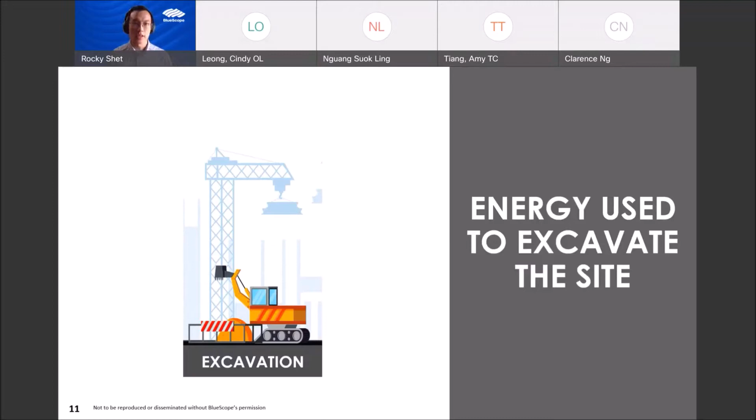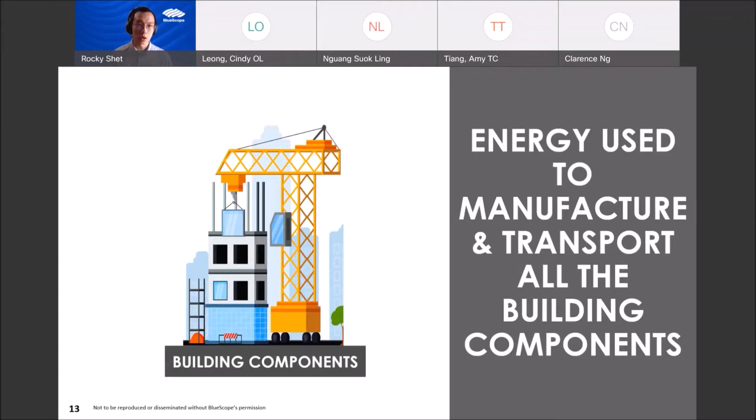So the energy used to excavate, for example, a site, and the energy used to build the structures, and also the energy used for all the building materials to be manufactured, transported, and installed onto the building site - all this energy will be calculated together, and we draw a line when the construction is completed.

Of course, throughout the building lifespan, if there is any retrofitting, those will also be counted into this embodied energy. Then when the building is in use, during the usage time, there'll be energy - like electricity, water heater, cooling systems, and whatnot - that is used to operate this specific building.

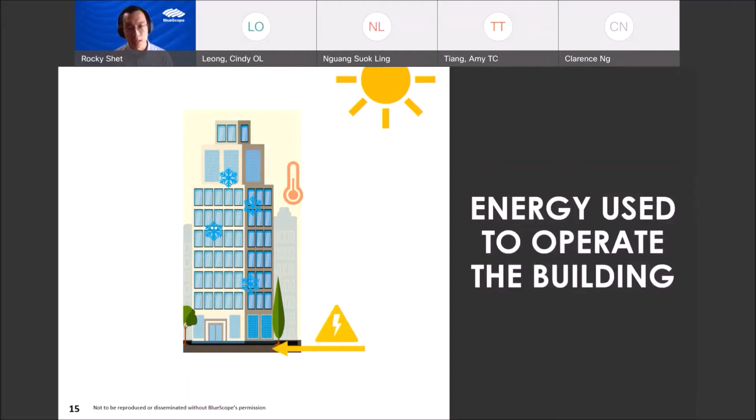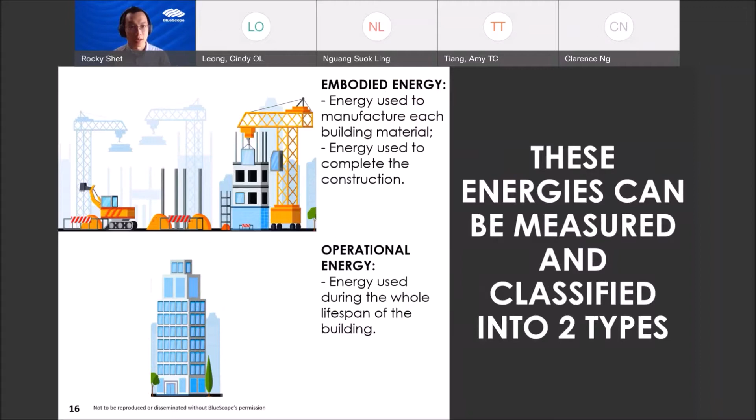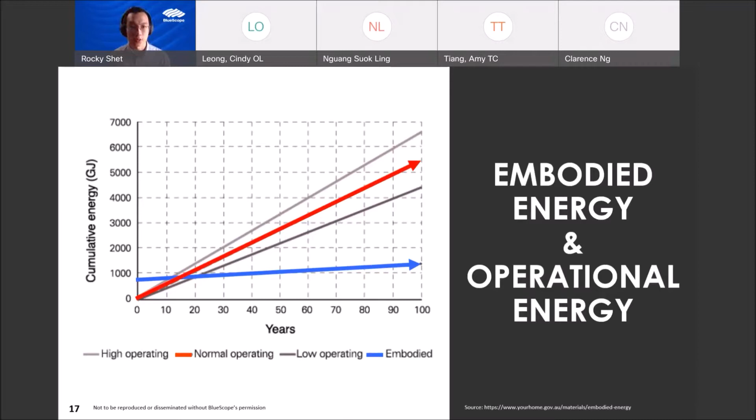So these two are very important concepts for us to use during my presentation later on. I'll link some of the aspects for metal cladding to these two specific types of energy use and how it contributes to different energy. So the first one is what we call recycled content.

So for metal cladding, of course, we use different types of metal, but prominently we use steel, right? Steel is recyclable. Let me just show you upfront. In different rating tools, you can actually score different possible ranges of scores for recycled content of the metal cladding.

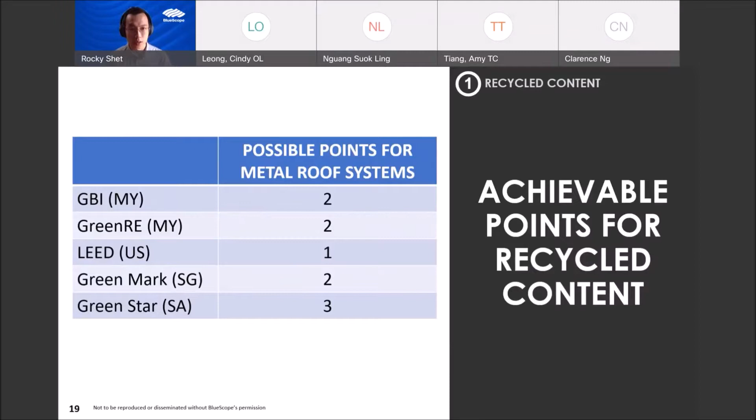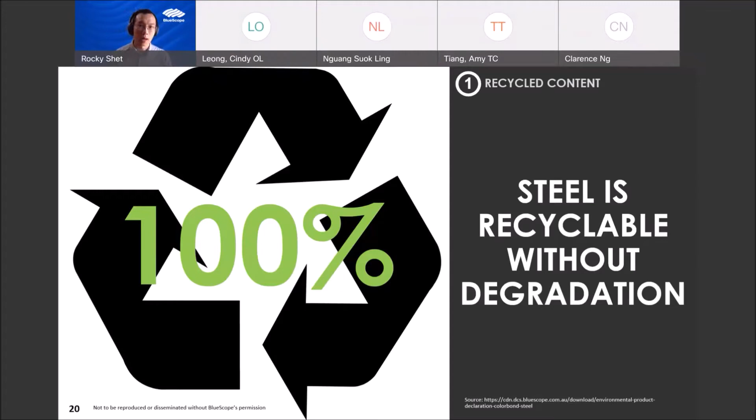Of course you can search online for all these rating tools for different types of building. But the idea is that steel itself is virtually 100% recyclable without any degradation, right? So you can recycle it without worrying that the quality will degrade in the long term. But of course, doing so we have to consider the life cycle of steel, from raw material extraction all the way to usage, installation, and of course recycling.

So the emphasis here for recycled content is the last part, where we get the offcuts or even the waste or scraps from the construction sites to the recycling or upstream process of making steel. Here I would like to highlight two terms. One is called pre-consumer recycled content, and another one is called post-consumer recycled content. These two factors will be used to calculate the overall recycled content.

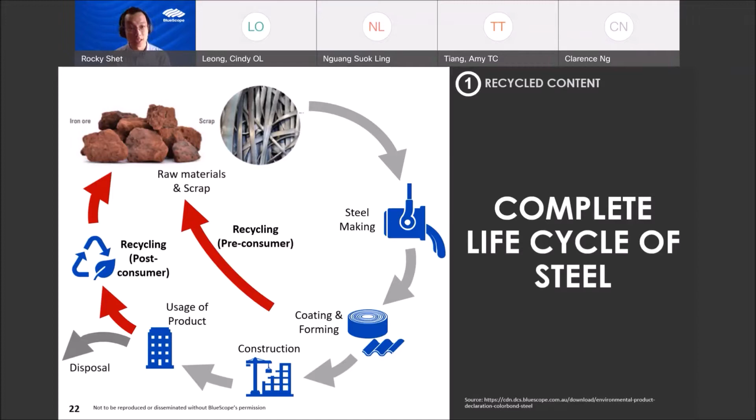For your simple understanding, pre-consumer recycled content means the scraps that are generated when the product is still in the production stage, right? Those offcuts from the production stage will be sent to recycling. The second one, post-consumer recycled content, is sourced from, say, construction sites when the building has reached its end of life.

The recycled content calculation is not as simple as adding post-consumer plus pre-consumer, but it works this way: 100% of the post-consumer recycled content, plus half of the percentage of pre-consumer recycled content. That gives you the overall steel recycled content.

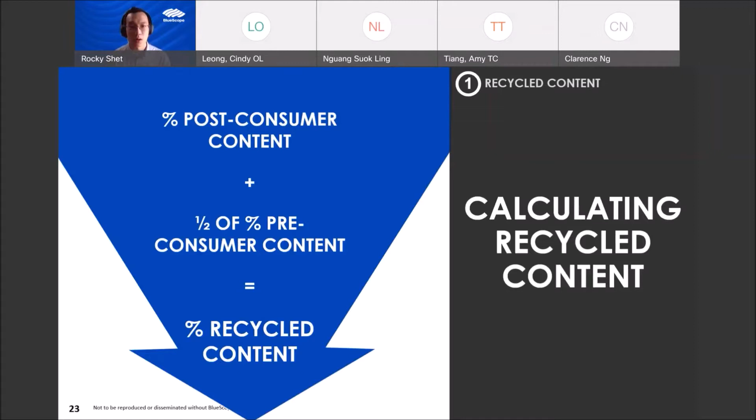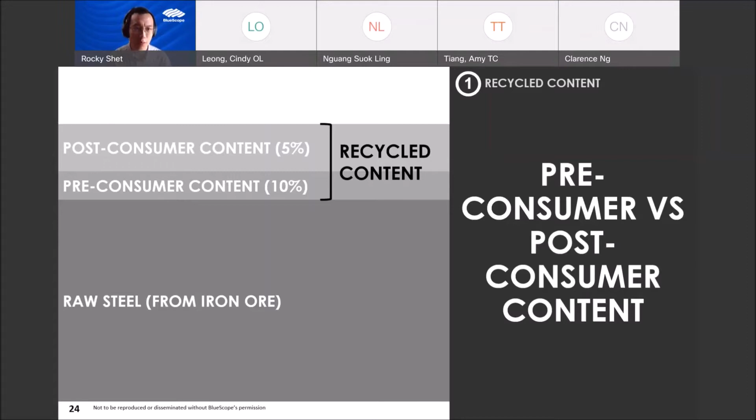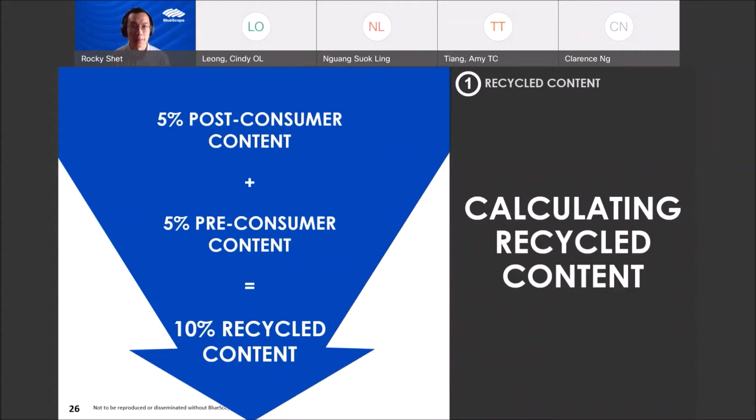For example, let's say in my steel I throw in 5% of post-consumer recycled content and 10% of pre-consumer recycled content. What does it give me? Here you can see the calculation is very simple. It's 5% plus half of the 10% pre-consumer, which gives you 10% overall recycled content. Based on different rating tools, the minimum requirements to score a certain level of points are as you can see here.

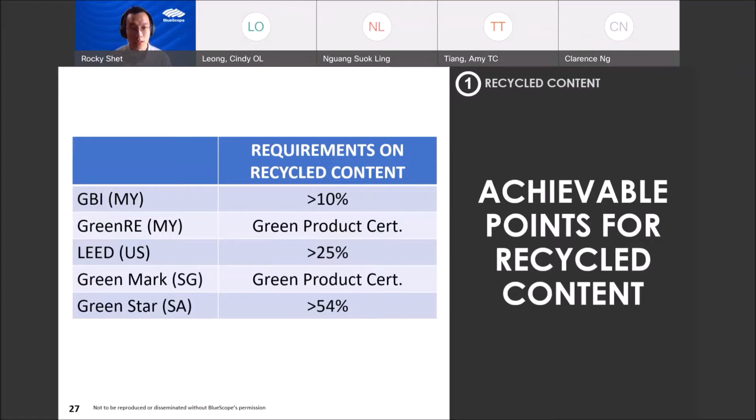Certain rating tools like GreenRE or Green Mark do not specify the percentage of recycled content. Rather, they emphasize green product certifications. The reason for this reference to product certification is that certain product certifications have already put in a minimum recycled content requirement for certain products. That's why it is more consistent for them to refer to the green product certs. But for others, it's much more specific, right?

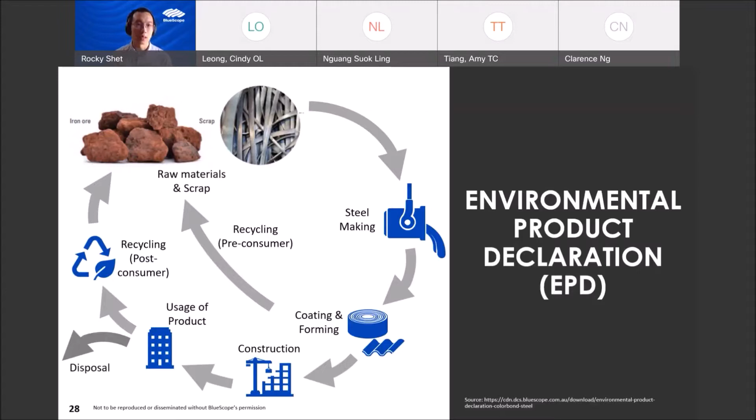So, coming back to this life cycle. What I would like to emphasize today is the next trend. Counting recycled content is not going to be the stop to make sure that there is a circular flow of material. The next step here is environmental product declaration, or in short, EPD.

What environmental product declaration means is that we will actually classify the product life cycle into different stages. As you can see here, there will be 5 stages: production stage, construction stage, use stage, end of life, and lastly the resource recovery stage.

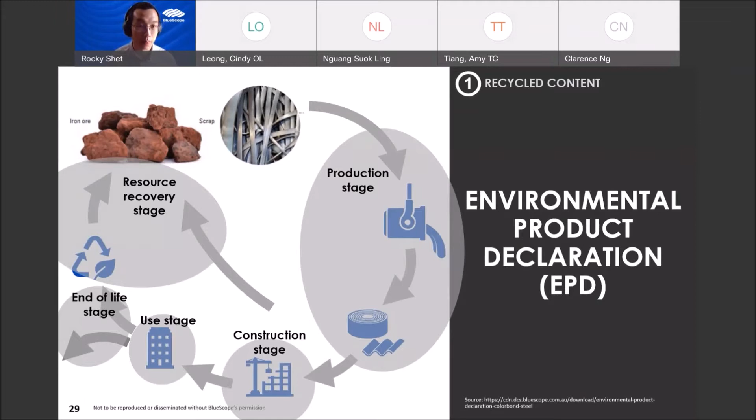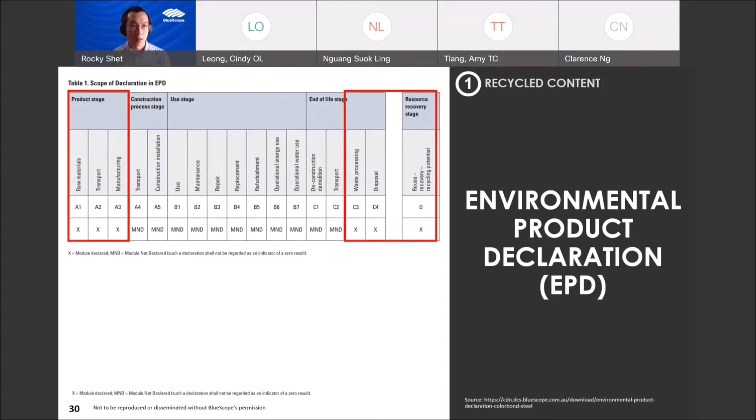Our counterpart in Australia has actually done such a study, and this study cannot be generalized for one product or one company. It has to be applied for that specific location, that specific production site. So this is done in Australia, and I'm just sharing with you what is possible, right?

For steel production upstream, we are involved in the production stage, part of the end of life stage, as well as the resource recovery stage, meaning recycling. Here you can see, based on certain standards, you can classify different stages with different letters: A for production stage, C for end of life, and D for resource recovery. B is for usage duration. The X means where we declared the energy use.

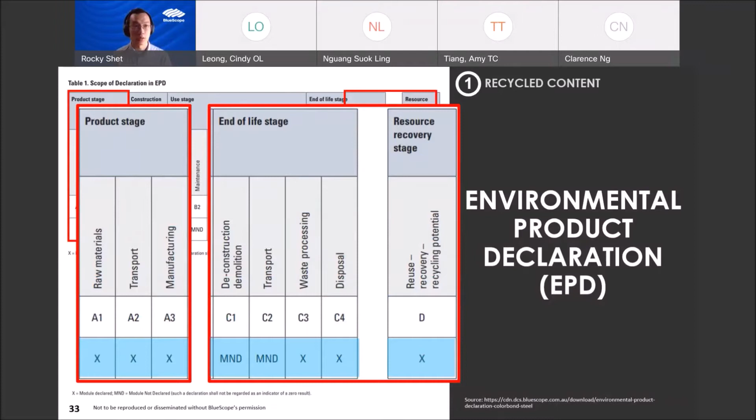Of course it looks something like this on a more detailed level. You can see it's very specific to a certain location, because aside from all these stages, transportation also counts as part of this EPD assessment.

So I extracted out the gist of what I'm going to show you today. Of course, part of this EPD declaration is that you need to calculate at different stages of the life cycle how much impact it causes to the environment. These are CO2 emissions in this specific process, the sulfur dioxide emissions, which contribute to acidification, also called acid rain in layperson's terms, and the energy depletion for natural non-renewable sources like fossil fuel.

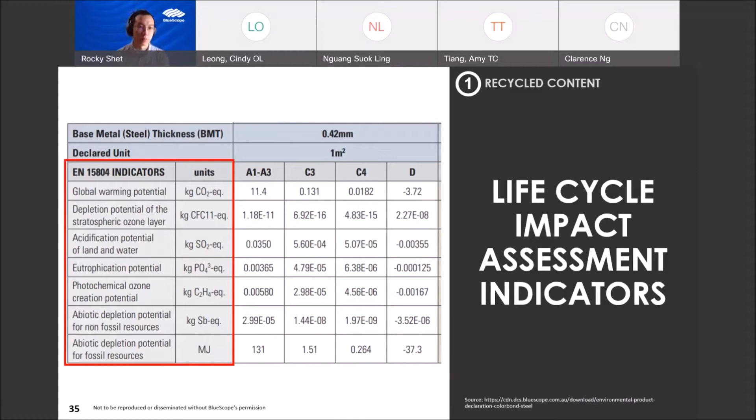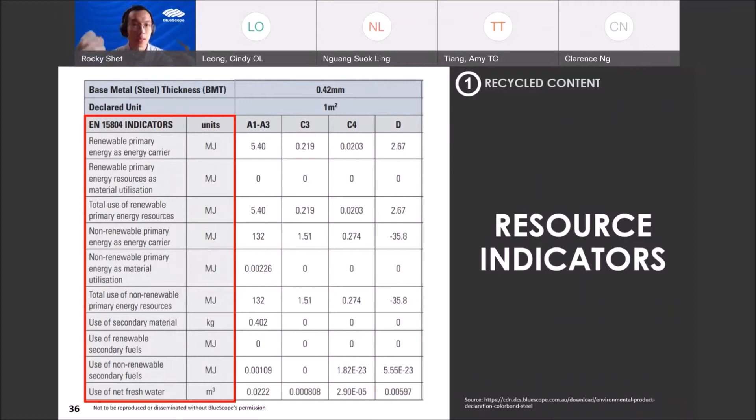Then there are also aspects of calculating the total energy use for different processes. So if you count the keyword energy, you're right, because again, we are linking back to the embodied energy here. Recycled content means the energy spent to produce this amount of steel, and that energy will be calculated into the material itself, and when it's used on your site, it is considered part of the energy used to build that building.

Then last but not least, some other potential hazards from these different processes. So if you look at certain figures like what you can see here, E negative 4 actually means 10 to the power of negative 4. It means it's very, very negligible. So there are certain numbers that you should be aware of.

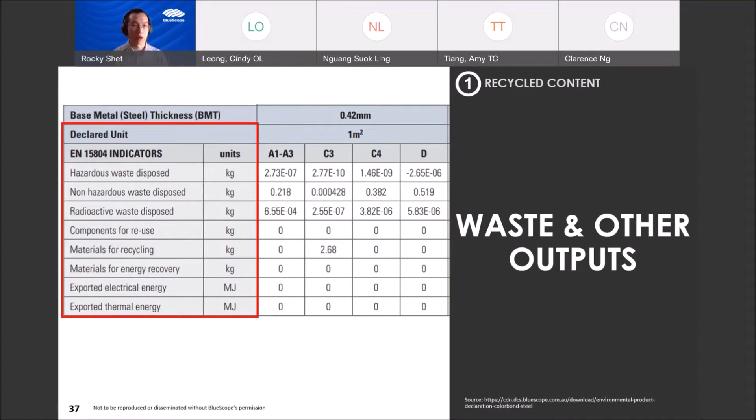But anyway, you can actually download this. It's a public document you can download as your reference. But again, it's not generalized, so you cannot use it for other countries or other production lines, especially in Malaysia.

So there are also green points applicable for the solar reflectance index. The recycled content I mentioned is for embodied energy. The solar reflectance index is to measure the performance of the building during its operational life, so it contributes to the operational energy side. So what is solar reflectance index? I'll get into it later on. But first, let me share with you the scoreable points for different rating tools. On average, 2-3 points are scoreable.

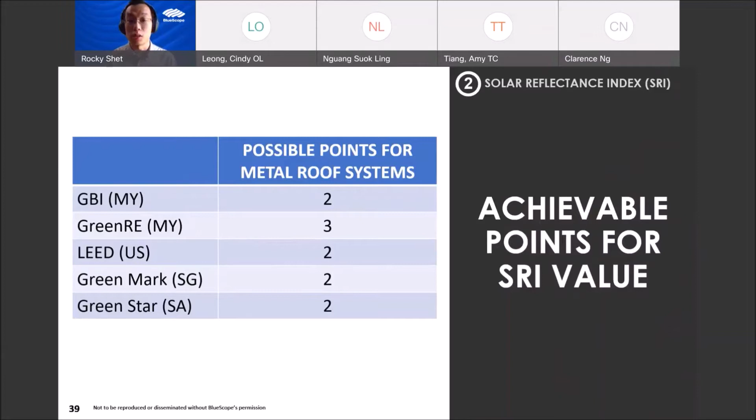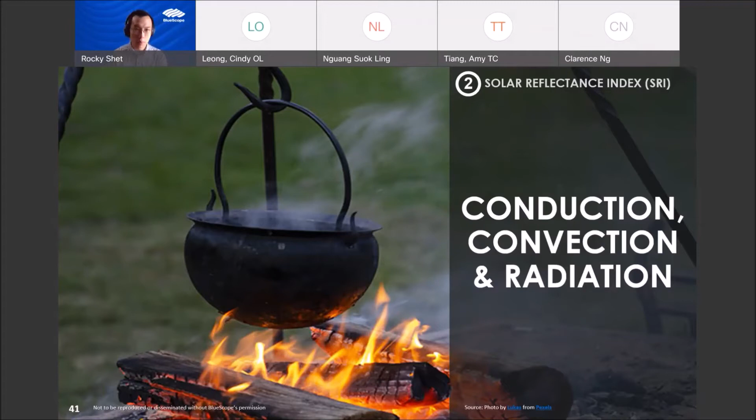Heat transfer basically means heat passing from one source to another. There are 3 mechanisms where heat passes from one body to another, or one medium to another medium: conduction, convection, and radiation. So how do these 3 work? Let me go in this order. I use this example of a campfire heating up a pot of hot water. The first is radiation, where when you have fire or any heat source, that heat source itself will emit radiation.

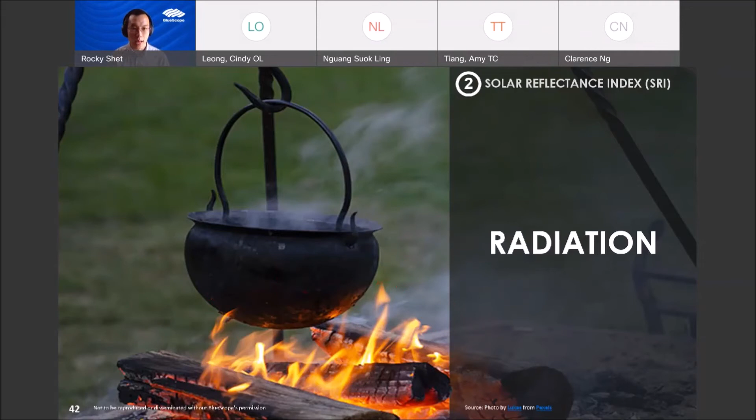The most common radiation that we expose ourselves to is sunlight, like vitamin D, when you stand under the sun. There are very harmful radiations and also not so harmful ones. Sunlight radiation is not so harmful to a certain extent. Radiation does not require a medium to transfer, so it can be transferred through air, through vacuum. So this is the first one.

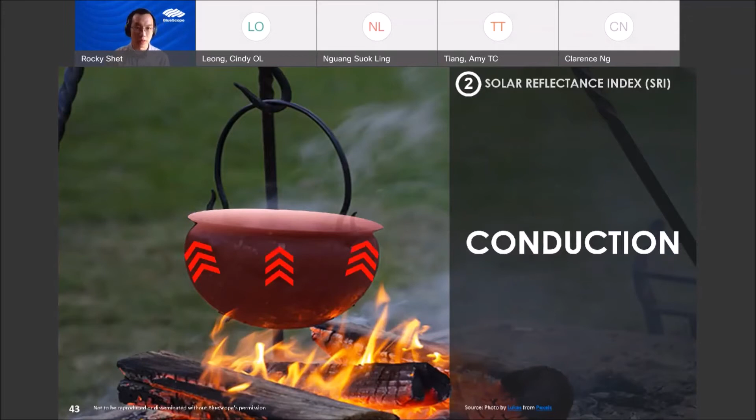The second one is what we call conduction. In this example, the metal itself gets heated up due to the radiation, and from there it transfers the heat from the closest part to the radiation to the furthest part. So it will heat up the whole homogeneous metal itself.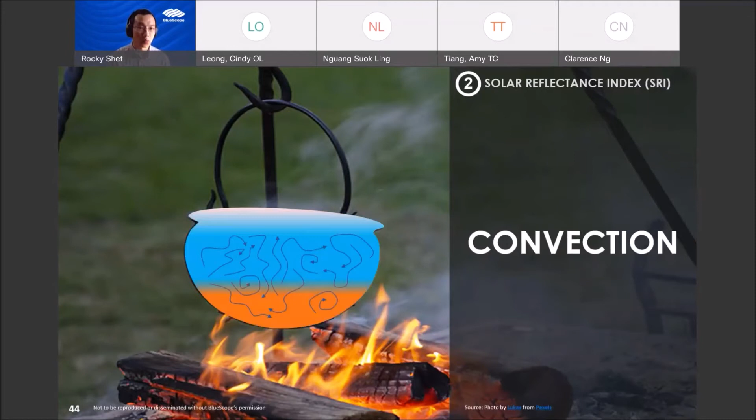The third mechanism is where it heats up the water inside. Water is considered a liquid, meaning it can flow, so the water will start moving around. That creates what we call convection. Heat transfers as the water goes around. And of course, when it evaporates, this is another form of convection, where it gets blown away by air.

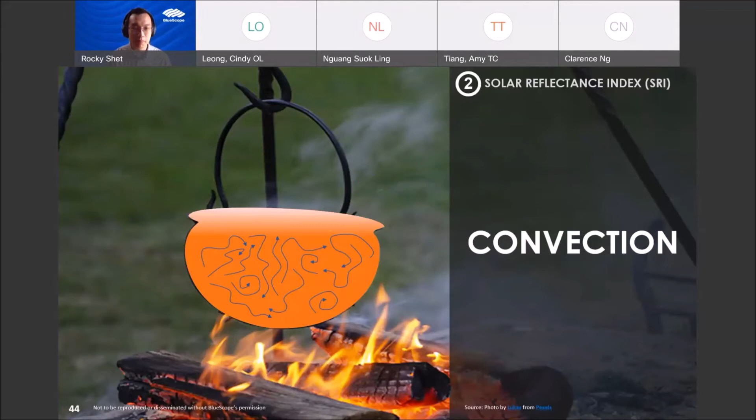And the air itself will actually act as a mechanism for convection, to cool down the surface, or even the metal itself. So these 3 principles are very important for this topic of solar reflectance index, because as I mentioned earlier, if we stand under the sun, the most common exposure of this type of heat transfer is sun. And for sun, the most common exposure of heat transfer is radiation.

So it's not very harmful, and the part where it will actually cause your building to heat up is the near infrared side. There are actually different spectrums of so-called sunlight, which we have covered previously on a certain occasion. But today I would like to focus on the near infrared spectrum of the sunlight. The near infrared spectrum of the sunlight is not visible. That means you cannot see it with your naked eye.

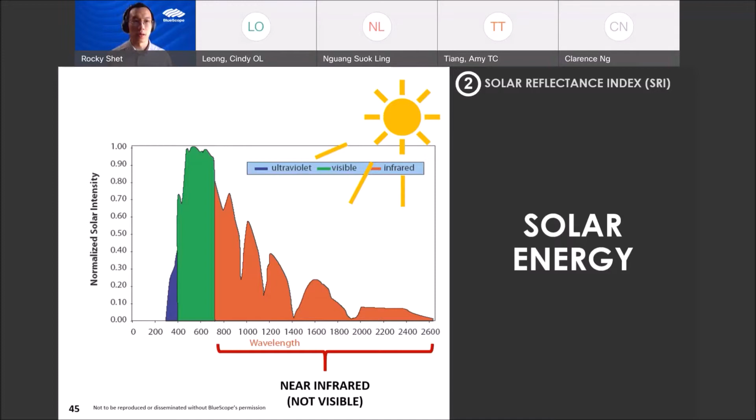But it will actually be felt through a different medium, which is heat. You can feel the heat if you stand under the sun, but you cannot see how it transfers to you. How it transfers to you is through radiation. So let me share with you how it heats up the building. When you have the sun and your building, if let's say your building is, for example, a black color. Today I'm using black color roofing sheets as an example, but it can be any other material, like tiles, asphalt, bricks, and so on.

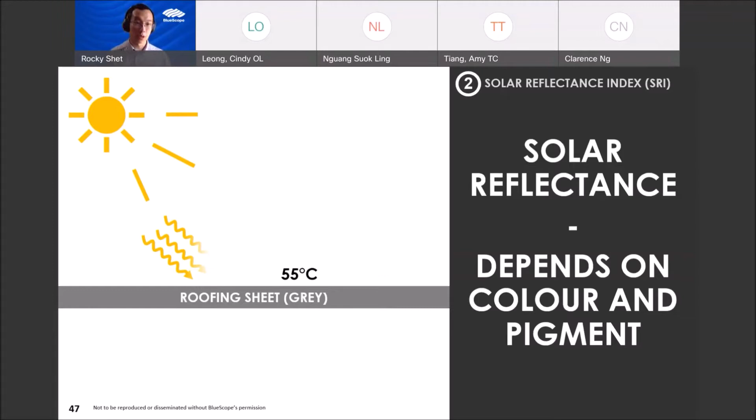But if let's say you change the color of the roofing sheet to gray, then more of the radiation is not absorbed, but is reflected, and the surface temperature will be reduced. And of course, if you have a lighter color like white, then most of the so-called radiation can be reflected. That means you will not heat up the roofing sheets so much. The example shown here is that the roofing sheets for this white color will be 40 degrees Celsius.

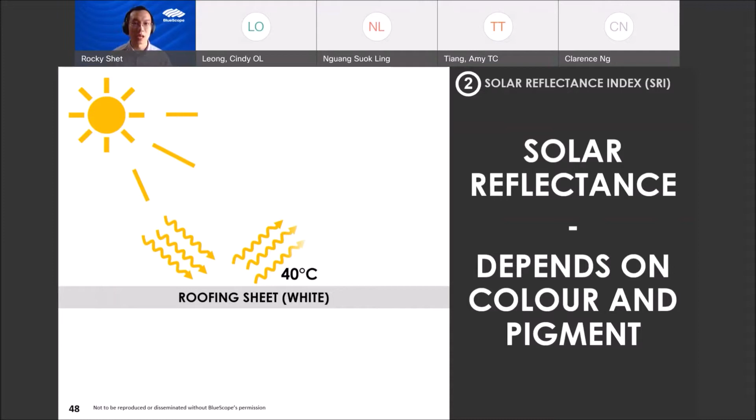So that aspect of the material is what we call solar reflectance. Solar reflectance. So we are getting closer to understanding what is solar reflectance index. This is the first aspect for you to understand solar reflectance index, or SRI. Of course, the second one is much more tricky, and is sometimes misunderstood. Even for me, initially when I did the study of this topic, I was also misunderstanding what is thermal emittance. So let me share with you the understanding of this.

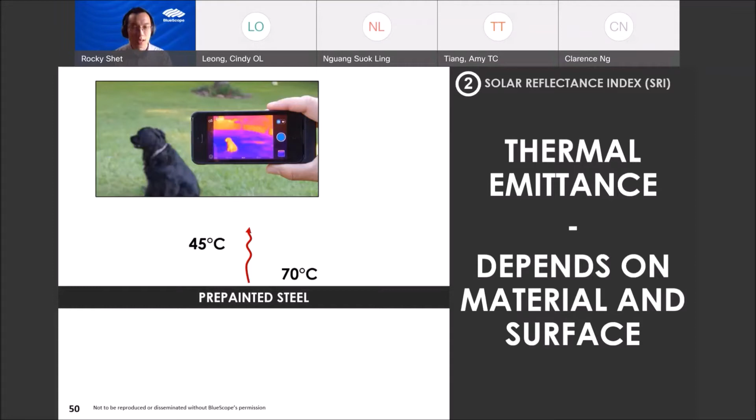So if I change the material to pre-painted steel, for example, the temperature of this material can be 70 degrees Celsius. But if you use the thermal camera to measure it, you might pick up a different temperature. You might have a reading of 45 degrees as opposed to 70 degrees just now. So what is interesting is that thermal emittance is a measure of how much radiation one body re-emits back to the environment. It is also highly dependent on the type of material, the type of finishes, and so on. To further illustrate this, let me show you one example that I've captured recently.

So having locked myself at home, this is what I made. There's a toaster, and there's a thermal camera capturing how this toaster works. What you can see is that there are those grills heating up the chamber, heating up whatever is inside, as soon as you close the lid at the front door.

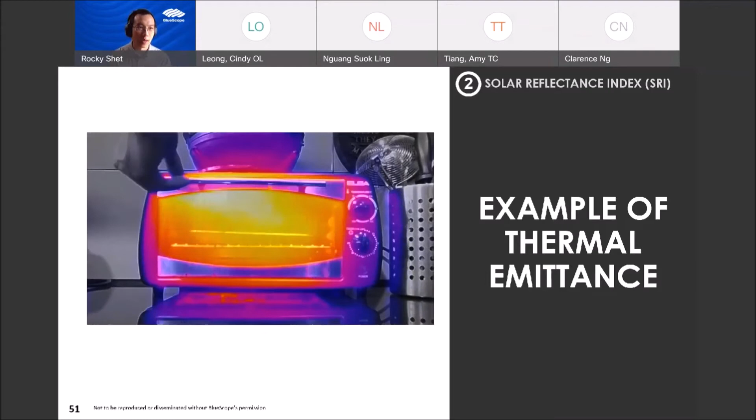What happened is that you can see there are actually very different signals of heat being picked up, right? So this is because the glass that is on the cover has a different thermal emittance compared to the material inside. Okay, so that is how it works.

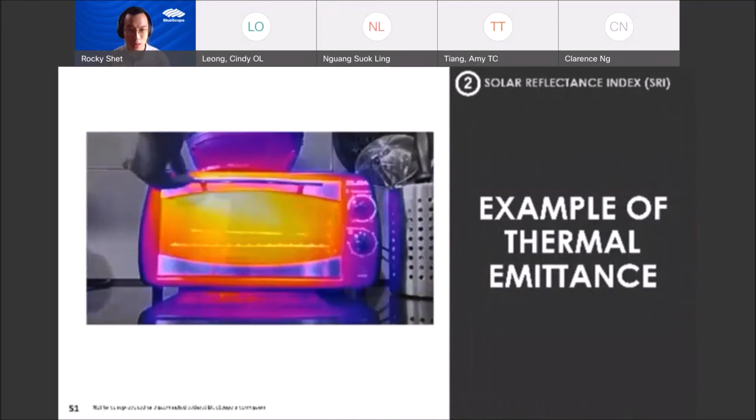So here, another thing that I'd like to highlight is that you can see the tray inside is meant to be at the same temperature as the chamber, which is 150 degrees Celsius. But what happened is that when you use a thermal camera, you are not picking up that signal, because that is not the amount of thermal emittance, or so-called the amount of radiation being emitted back from this tray back to the surroundings. So these two are very important aspects or factors to calculate the solar reflectance index.

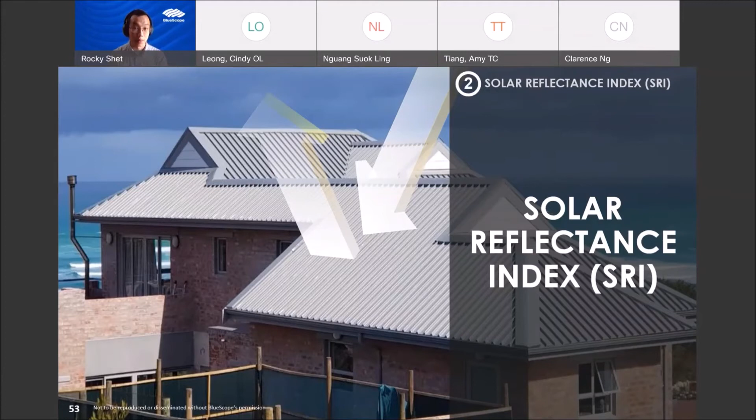All right, so of course, solar reflectance index, in simple terms, means how much of energy is being absorbed and re-emitted back to the environment, right? So ideally, if you have a higher solar reflectance index, then it is good to reduce what we call the urban heat island effect. Okay, that means it will absorb less of the radiation from the sun, I mean, that is the largest source of radiation, right? And it will also emit less of the energy back to the environment, right? So these two are the things that you use to calculate.

So you can search online for this calculator. So it's very easy. So SRI is a calculated value based on the solar reflectance as well as the thermal emittance. So you can search online to input all these different figures, and then it will calculate for you immediately what is the solar reflectance index for different materials and different colors.

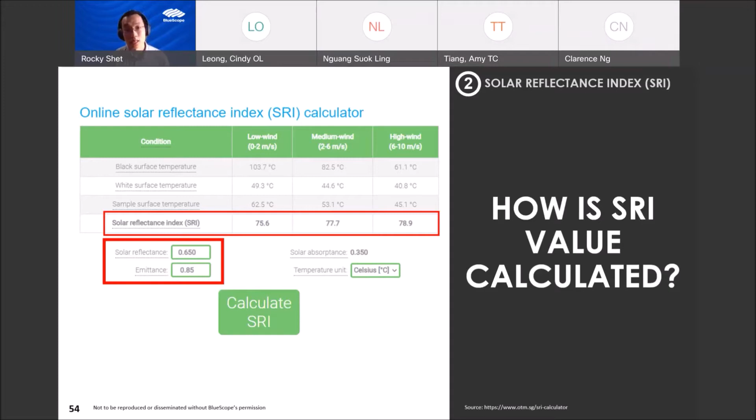So of course, another aspect of this is that it also depends on the type of convection, the wind speed, in your specific environment. A commonly used assumption will be the medium wind speed, which is in the middle. So here, one example I'm showing you is giving around 77.7 SRI value, and this is a unitless value.

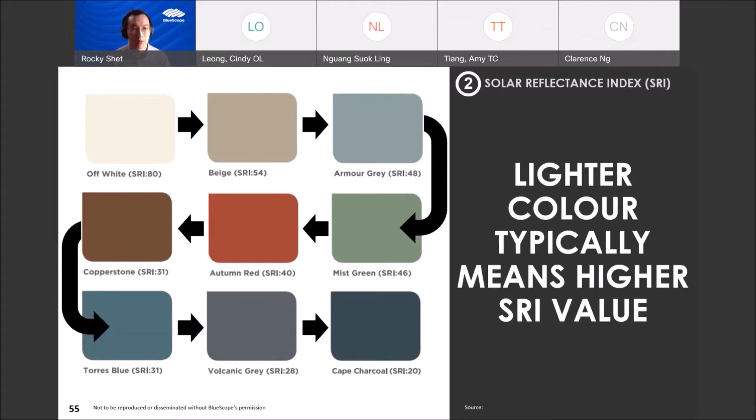All right. So of course, for our colors, I mean, these are our examples, but it applies throughout different building envelope materials. Yeah. So what you can notice here is that the higher SRI value is normally on a lighter color, and vice versa for the darker colors. And let's go back to the picture that I showed you earlier.

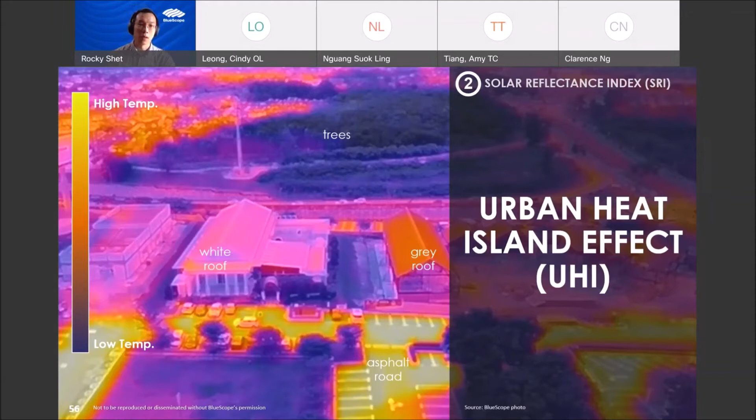Okay, so of course, there are also nuances to how you can actually select the material, right? So certain materials come with clean technology, certain materials do not. The reason why is because if, let's say, you have a material that has a self-cleaning ability, and this does not just apply to metal roofs but also to glass, windows and whatnot, it will be able to make sure the color stays lighter. Lighter in color means the SRI will be naturally maintained at the original state, as opposed to getting dirtier and reducing its SRI value.

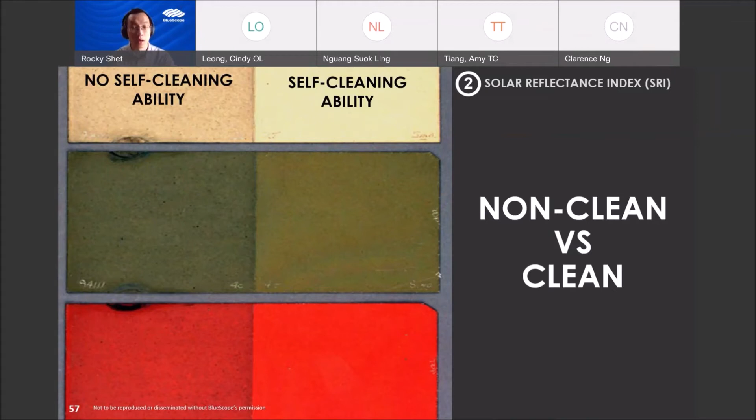All right, so of course, higher cleanliness directly means higher SRI value. The judging criteria and minimum requirements for all these rating tools are very different. But I would like to highlight LEED from the US. One thing that they have changed in their SRI requirements approach is that they also stated a performance requirement, meaning after 3 years, the SRI value should not reduce too much. It should stay above a certain figure, because they acknowledge that building materials get dirty, get darkened, get stained over time.

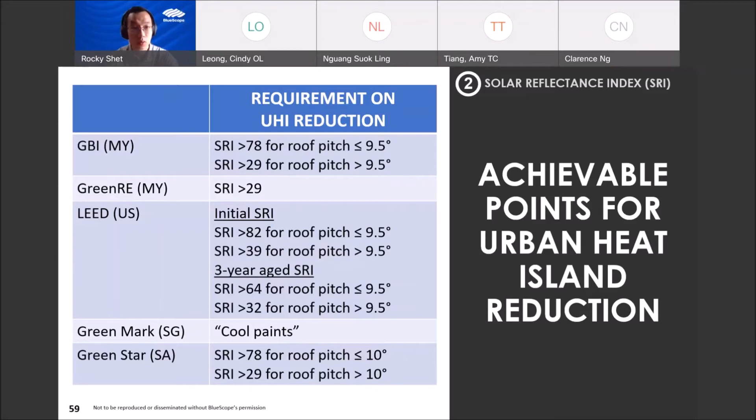So this is one of the more progressive ways of controlling these aspects. But again, you can use this knowing that if you score this point, it is to reduce the urban heat island effect. Okay, so I won't delve into this deeply today, but if you guys are interested, we can create another session just for this explanation.

Yeah. So last would be the thermal transmittance, commonly understood as U value. As you can see from the diagram, thermal transmittance means how much heat is transferred from outside to inside or inside to outside. Of course, I'm speaking in the context of Malaysia or Singapore, all these tropical countries, where typically it will be hotter on the outside, and the scenario won't change to hotter inside and colder outside, because we want it colder inside, right? So the heat transferred inward, how much of it, that is what thermal transmittance is.

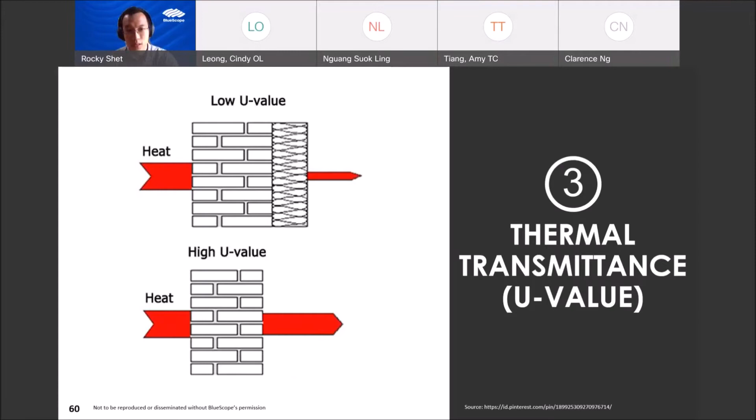So here you can see two different diagrams, one with just a brick wall and one with a brick wall and, on the right, the insulation layer. Of course, the scoreable points here range very differently. The reason is that there are different rating tools for different types of building. I'm merely using the house rating tool here to study it and also see what points are applicable.

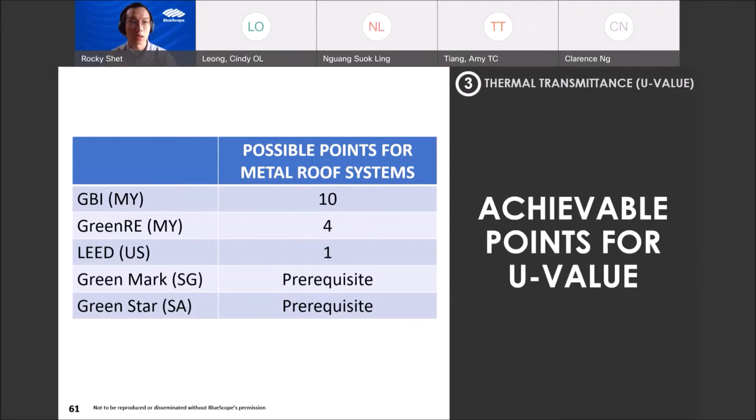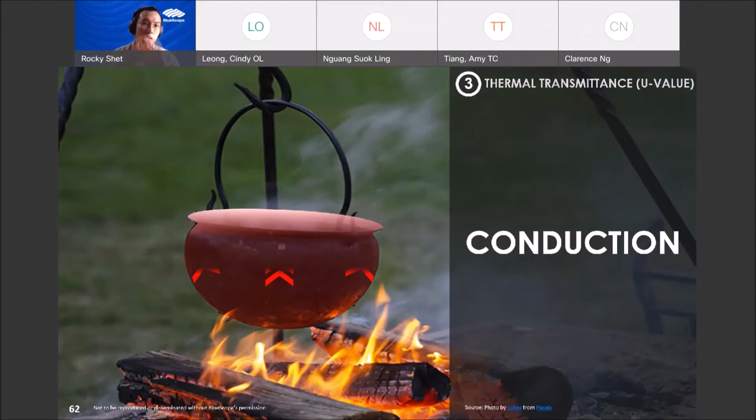Of course, LEED does not just look at this thermal transmittance; they look at the envelope thermal transmittance, meaning the whole building's thermal transmittance, to ensure that it is covered completely. And this one relies a lot on the conduction aspect of thermal transfer. As I mentioned earlier, it applies not just to the roofing segment but to the whole building envelope. But most commonly, the roof is the primary area that is sun facing and exposed the longest hours to the sun. That's why it's commonly highlighted for roofing to have a certain thermal transmittance value or U value. All right, I'll use U value because it's shorter.

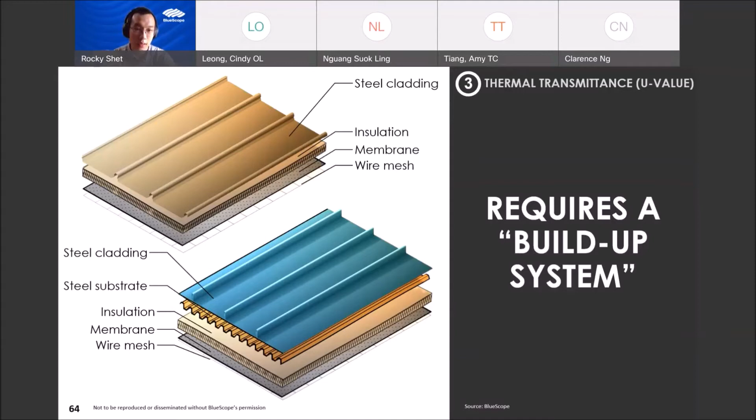Right. So here I show you two different types of build-up system. One has more build-up than the other, but what I would like to highlight is that the insulation layer is crucial to the thermal transmittance value. Let me go deeper into why. For example, if you have a metal roof, a certain amount of heat is transferred inward, and a certain amount of heat is repelled, re-emitted outward from the roof.

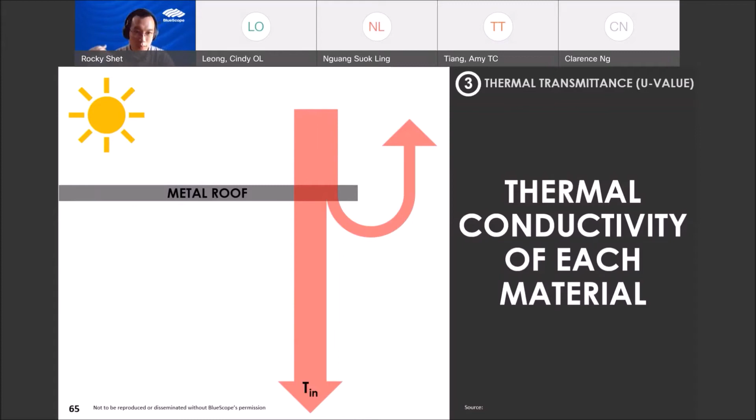Okay, so the metal roof itself will get heated up, again depending on the SRI value. It will heat up to a certain temperature and then re-emit the heat to the surroundings, either inward or outward. Of course, with a lower SRI value, it will emit more heat back to the environment, inward and outward. And without any insulation layer, more heat will come inward. So that is the basic understanding here.

But if you add a certain amount of insulation where you want to insulate, less heat will be transmitted inward, and most of it will be repelled outward. This is to make sure that in a tropical country, or in a four-season country during summertime, you will feel less heat when staying indoors. And the more insulation you have, the more comfort, or the less heat will be transmitted through the wall or through the roof.

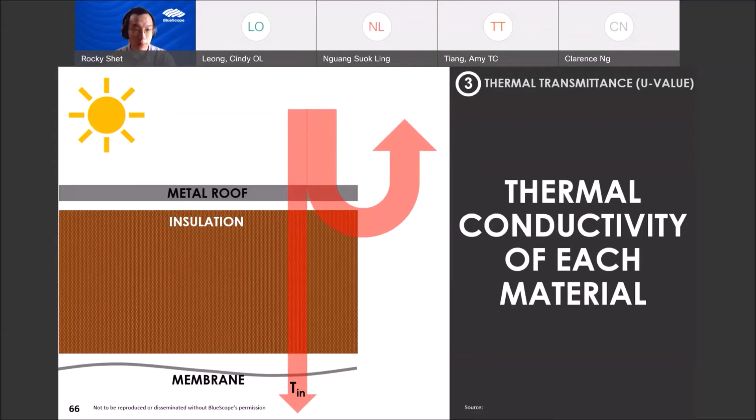All right, so linking it back to this thermal transmittance or U value, you can actually calculate U value by getting the thermal property of different materials. It's not just relying on the thermal properties of one material, but all the materials that are used for your build up.

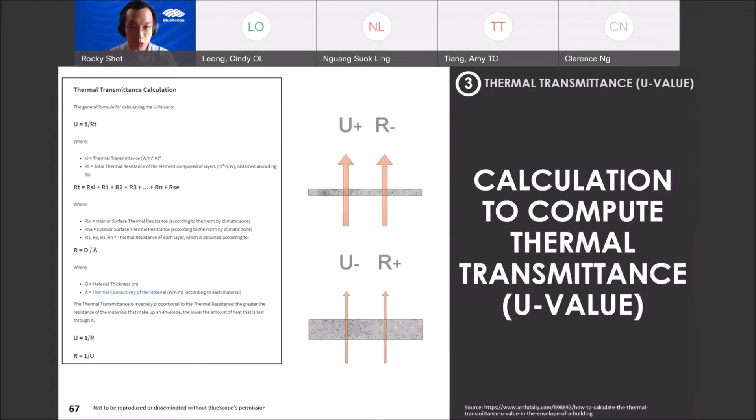If I show back the examples I've shown earlier, if let's say you have just a metal cladding, the U value can go up to more than 4 watts per meter square Kelvin. So this is the unit of U value, it's not unitless. U value for a metal roof can go up to as much as 4 watts per meter square Kelvin, even more, also depending on the situation, the condition, the color itself.

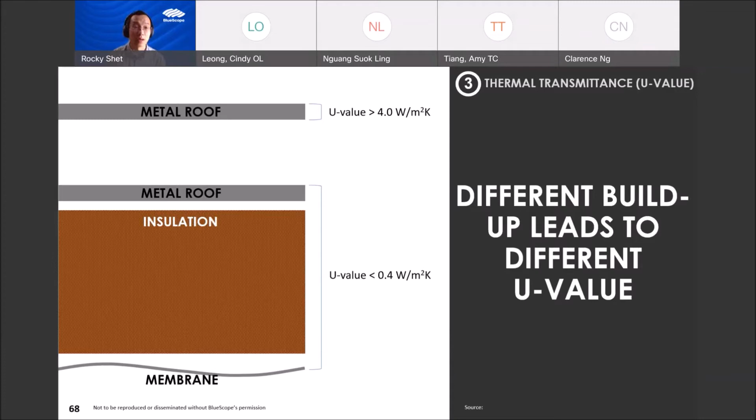Then for U value for insulated panel built-up systems, it can go down as lower than 0.4 watts per meter square Kelvin. So of course, what is the ideal or minimum requirement for this build-up system?

For different rating tools, again, they use different types of requirements or different values. So the straight up answer to you is over here: U value less than 0.4 for you to get a minimum of 1 point.

Of course, if you improve, that means if you reduce the U value for your build-up system more, then you are eligible for more points. If you recall, just now I mentioned 10 points, so those are the eligible points. Let's say you really want to improve the roof system's insulation level, so for Green RE, the minimum requirement for roof is 0.35 watts per meter square Kelvin.

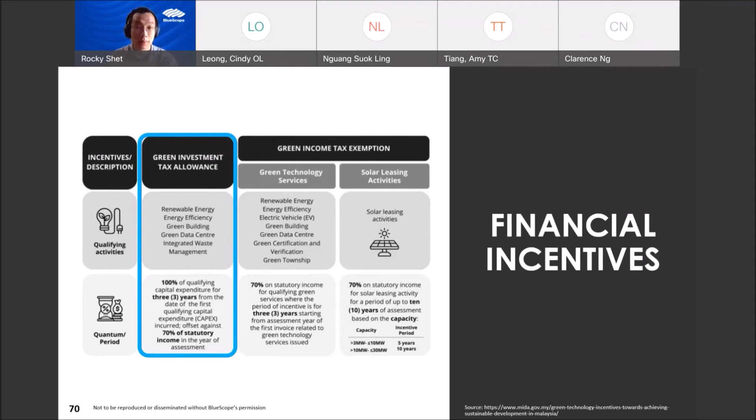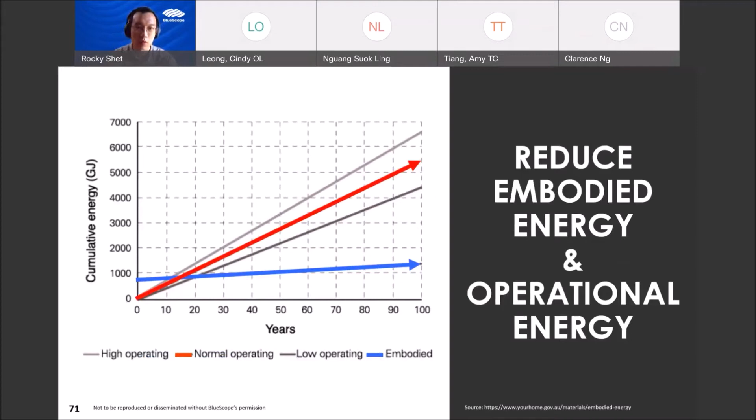So aside from the monetary benefits, let me just conclude it, coming back to the energy usage. Just like I mentioned, embodied energy as well as operational energy. What we are aiming to do through all these different aspects of green building improvement is we are essentially reducing both types of energy use. For embodied energy, it means you use less energy to build the building, considering both how the material is manufactured and how it is built on site.

With a declaration like EPD, you can reliably calculate things better. For operational energy throughout the lifespan of the building, you can safely reduce the energy used to maintain the building, meaning you don't have to sacrifice any creature comfort or performance requirements, you're just saving energy. Those are the not-so-immediate impacts that investors might not see but need to be highlighted.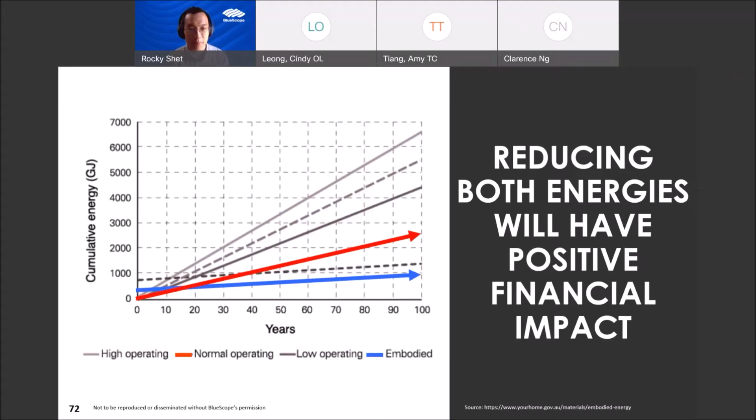Let me quickly conclude today's session. I covered recycled content, segregating it into two parts. Increasing the recycled content of a material drastically reduces its embodied energy. And the solar reflectance index, as well as the U value, or thermal transmittance value, of the roof or metal cladding system can be improved to improve the operational energy side of things. Whatever I highlighted earlier is recorded, so you can go back to our YouTube channel to watch it again if you want a specific statement from me.

CS Low has a follow-up question: does U value also take into consideration the air gap between the roof and ceiling space? Yes, the answer is yes. U value takes into account the build-up, whether it's an air space — and for airspace you need to consider whether it's static air or flowing air — and also ceiling space. One tool I found useful for this is ASHRAE. If you search ASHRAE Advanced Energy Design Guide online, you'll find the guidebook, which you can download for free. It gives guidelines on what can improve the U value. I hope that answers your question.

What's the procedure to apply for a Green Building Certificate in Malaysia? Cost, timeline? There's no set procedure — I'm assuming you mean GBI or GreenRE and similar certifications. The procedure depends on the rating tool itself. Different rating tools have panels to judge whether your submission or design can be considered green. So the cost and timeline depend on the type of rating tool you're using, and it's linked to the different bodies administering and judging based on those rating tools. I hope that gives you some idea. Since I'm not the one doing the judging, I don't have a clear idea of the exact timeline and cost.

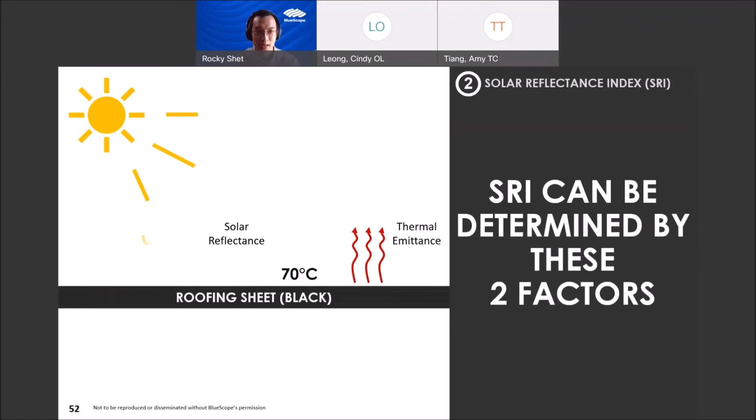One interesting thing is that for the ASHRAE calculation I mentioned earlier, they do consider this. The advanced energy design guide gives aspects on how to prevent that. But normally when people ask for U value, this isn't part of the consideration, though it should be. If you neglect thermal bridging, the actual performance might not be as good as expected based on the calculated U value of the building system. The guide gives insight on how to calculate it together with the Z spacer.

Next question from Yuan: does thickness in BMT make a difference on the SRI value? You mentioned color makes a difference. The short answer is no, thickness in BMT does not affect SRI value, because it relies on color and type of finish, not the thickness which isn't exposed to radiation. However, it does act as thermal mass, or heat capacity - increasing material bulk stores more energy, which affects U value, but not SRI value.

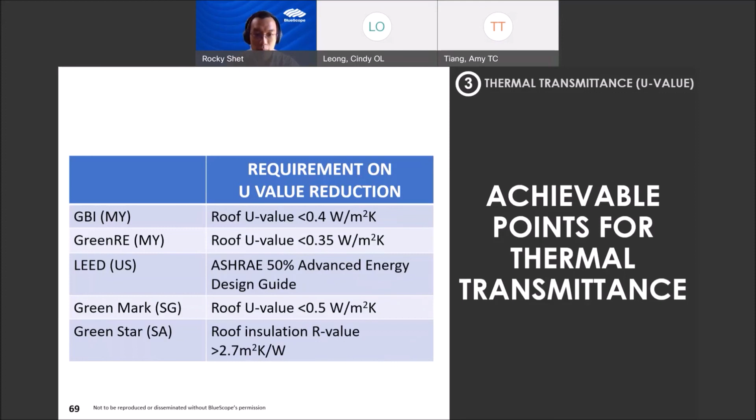So sometimes if you live in landed housing in an urban area, you might feel, oh, it's very hot. Why is that? Most likely it's due to this urban heat island effect. So by increasing the SRI value and having more greenery around your houses, it actually helps reduce the urban heat island effect. I hope that gives everyone some perspective on green building for metal cladding, and that concludes our Q&A session.